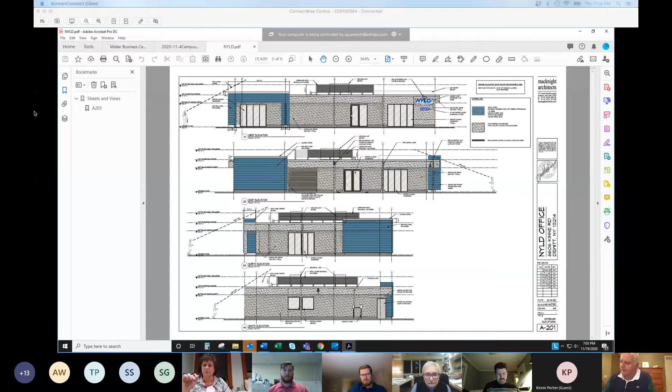I'll do my best. All right, the next item is the Midler Business Center. I think we received all the plans of proposed installation of a chain link fence and site modification in the industrial district.

Nick or Kathy, do you want to put us where we are after Bob's latest submission? Or excuse me, Nick or Stephanie? I'd be happy to walk you through some of the changes.

Please. Yep, okay. So from the last submission, from the last meeting, there was an expansion to the gravel area that we had originally reviewed, which was this parcel over here, and it was proposed to join up to the existing area with a reorganization of all the rest of the gravel lot, which showed some gravel access ways throughout. This proposes a really substantial cleanup to the site by showing a neat corner of the gravel now extending out to the front of the road to connect to North Midler Ave. There will be substantial landscape buffering.

There is now a wooden guardrail shown along the edge of this, just to keep this edge of gravel neat and contained within this area. All the grading is going to be pitching downwards toward the stormwater pond area, so this will keep it neat and keep this as a permanent edge.

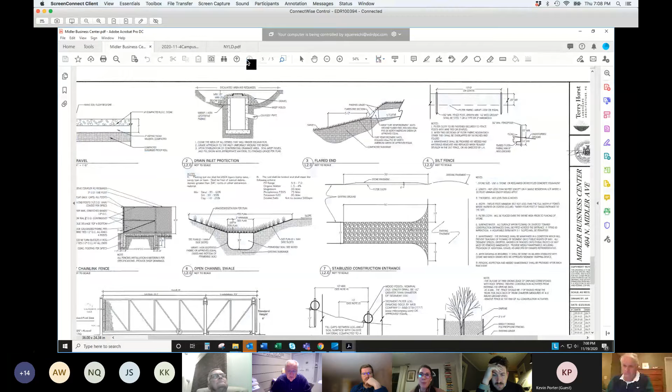The guardrail is a wooden guardrail. It's 6x6 treated posts, only up a couple feet high, with a 2x10 bolted into the vertical post. It's more of a visual thing than an actual guardrail that would get hit, but it will separate the grass area from the gravel area. Great, thank you.

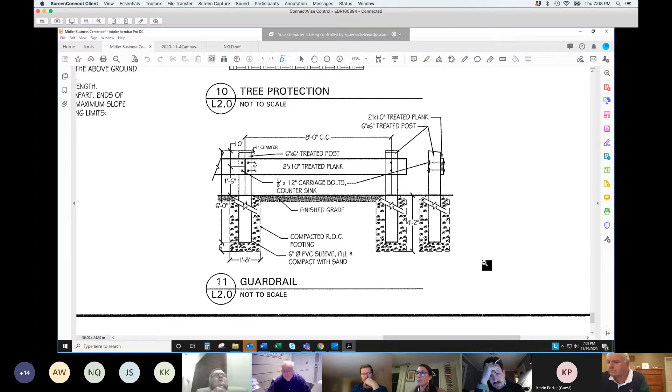Any other questions? No other questions? I think we're good.

We're good. Okay, I'll make a motion to approve the plan as presented with the following findings. The board has reviewed the resolution of June 10th, 2020, which is delivered without comment or modification.

No significant adverse inter-community or countywide implications. This plan was sent by the town of DeWitt to the city of Syracuse, which is adjacent to this property, and the city did not respond with any comments.

This approval is for the plans and other submitted documents, site plan documents that have been signed by the planning board chairperson and the applicant, and requires that all of the work shown be completed by the applicant in order for a certificate of occupancy or compliance to be issued.

Any proposed changes, additions, or deletions to the scope of work or materials from the site plan documents are not approved and are subject to further site plan review pursuant to the town of DeWitt code section 192-122.

That's the motion. Can I have a second, please? Steve, second. Nathan, aye. Steve, Joe, aye. Kathy, aye. I need to interrupt for a minute if I can.

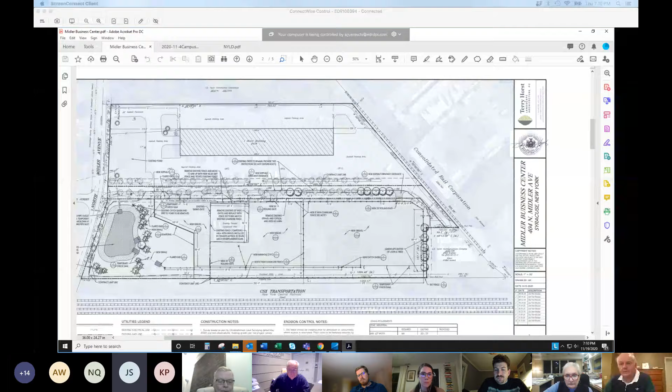Can everyone hear me? So Joe, I'm going to ask that you not vote. We have Kevin logged in as attending, so we have 7 members. So you came in late, so we've got Joanne, we've got Kevin, and he...

That's fine, I'll just listen in, sorry. I think I hit my mute. Did you hear that? Thanks Joe, that's all right. Yep, I'll just listen in.

Got it, the next two items. But wait, we're not done with the vote. Kevin, aye. Doug, aye. Okay, unanimously, thank you.

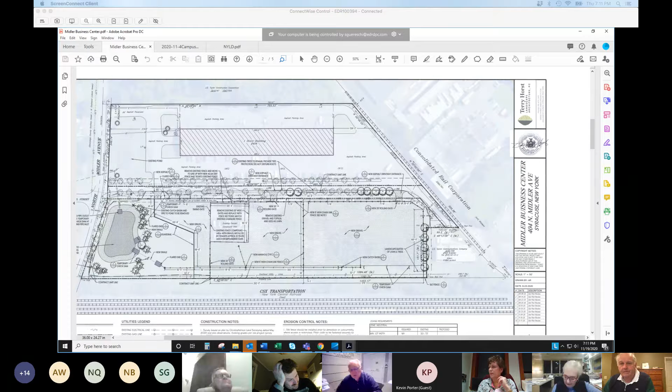Thank you. Do I come in to sign the approved documents tomorrow? Yes, you could speak, Dick. Bob, I'll coordinate with you for the signing of the plans. Okay, alright, thank you. Thanks Bob, thanks.

Okay, we have the KRSM canopy and loading dock canopy site modifications, existing building on Manlius Center Road. Who do we have for the applicant?

Hi, this is Alex Wisniewski. I'm representing the owner as far as the parking lot expansion. I believe there's some representatives from the tenant here as well tonight. Yes, hi, this is Paige Parham. I am representing Amazon here tonight.

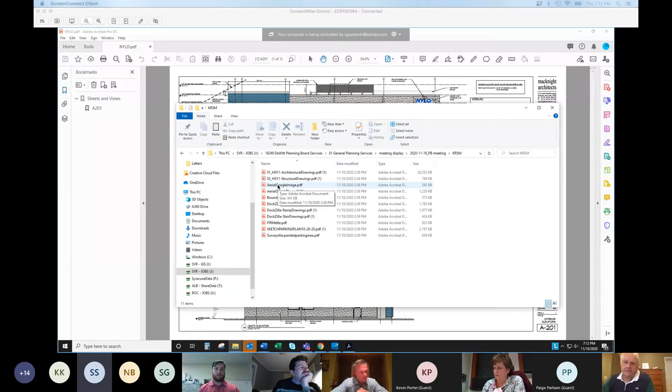Okay, I don't know who I should direct this to, but to start, I'm confused, and I think the board would like clarification on an interior renovation permit that involved a little over an acre of disturbance on a grass area, in an area that had previously been very pervious and covered with gravel.

This is Mike Tormey, I'm the owner of the property. I attempted to clean it up, and it was my fault. I thought I was to stay under an acre and didn't need a permit, but I apologize. That was my fault.

You didn't need a permit for under an acre. Jamie, would you comment on that? I just want to be sure the board understands the significance of what's happening.

The only thing I'd say is that site plan approval is required anytime there's work done on a commercial site, and there were changes. So that's why you're here, because of exterior changes to the site. The acre requirement has more to do with stormwater management, not the rules of the planning board, but the town code. That's why we're here, and it bears on the coverage.

Okay, so they're moving forward on the interior, and that permit is ongoing. I'd like to ask who's going to speak on behalf of the recommended changes being presented.

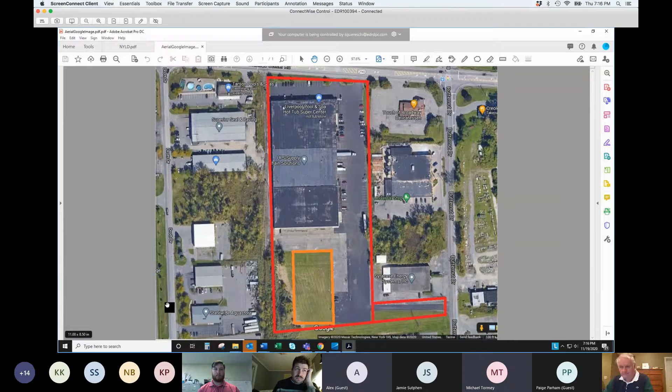If you look at the image on your screen, that's the existing conditions of the site. As Mr. Weber mentioned, the area shown in orange was previously a lawn area. We have a survey showing that a long time ago there were additional gravel areas there. Long story short, that new area was being prepped to expand the parking area as part of the lease agreement when the stop work order was issued. That gravel area is currently slightly less than an acre, and the new proposed plan before you tonight also keeps not just the new asphalt, but the total disturbance under 1 acre.

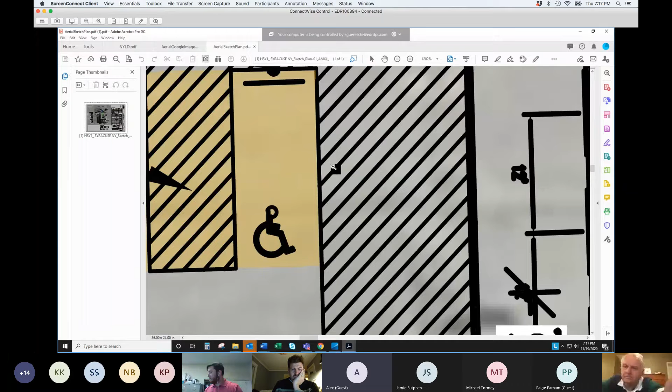The issue with that—Stephanie, if you could—yeah, that's a good one. This shows ideally what Amazon would like to do. It's showing this dock extension on the south side of the building, which would allow them to use an existing overhead door on that wall. The dock extension provides an additional 3 bays of loading, and the balance shown in red is essentially their long haul trucks, the longer tractor trailers, with room for 12 of those vehicles to park in addition to the 3 loading spaces associated with the dock extension.

The blue images are their smaller box trucks, with space provided for 39 of those vehicles. What you see in yellow is essentially employee parking, about 40-plus spaces. The intention is to segregate the employee parking and access to the southern wall of the building from the delivery vehicles and their parking, and that's driving the layout of the parking.

The positioning of the dock extension is really dictating the location of that existing overhead door, which starts to drive the site layout. This plan proposes about 0.9 acres of additional pavement.

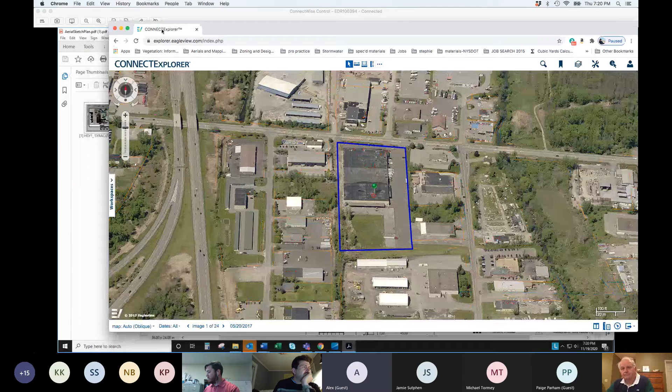So I guess we're to some extent looking for direction from the planning board. If you feel this is something that would be agreeable and you would support the variance, we would probably proceed with that application, before coming back to your board with the final engineered design drawings.

So I guess for starters, I think that's the big issue, is the need for the variance that this current layout mandates. And if there is a reasonable shot at that, I think we would attempt to pursue that variance with the ZBA. Well, I think there's another matter here as well.

I think we're looking at a traffic study. This is a pretty intense use of the property, so I don't think we can take any recommending action on a variance until we have a traffic study completed.

Okay, and that's understandable. The other thing in regard to the traffic study and combining the two parcels to get to approximately 81%, that seems to me in this tight lot that this is going to be a prerequisite almost of going forward. Is that something the owner is amenable to?

Yes. Yeah, combining the two properties, yeah, I have no problem with that. It would still require a variance, even with 82%, it would still require a variance. Correct. It makes it more comfortable relative to coverage, though.

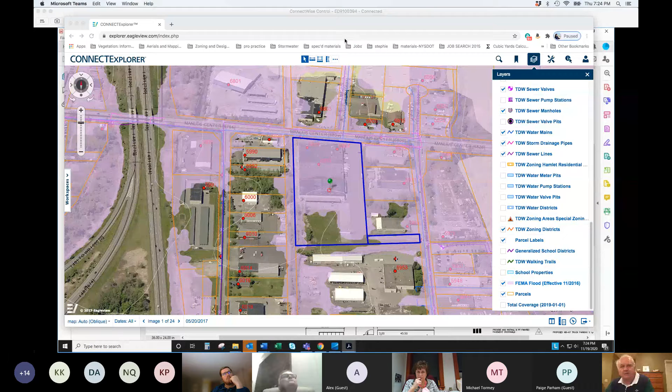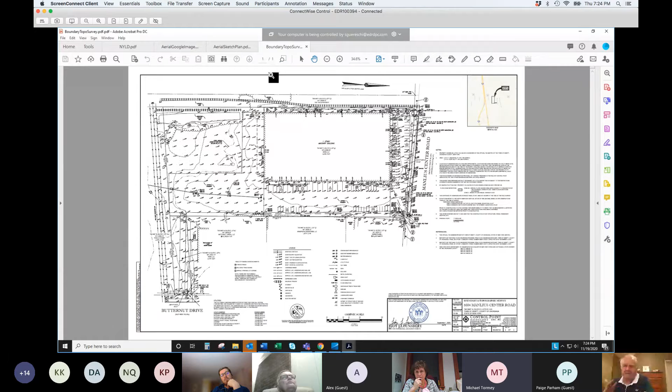I suppose I assumed that they would use the front entrance and Amazon would use the back entrance, so I didn't think it would have much of an effect on them.

Mike, if I could add, I think a traffic study would start to define the traffic patterns in and out of the site, and whether there are impacts to those patterns.

But if you are familiar with the site, you can see that on most days there isn't a lot of current traffic, and quite a bit of the parking is currently unused on that site, if that assuages any concerns.

Well, I think we would still be concerned with the need for a breakdown of the tenant usage, like how much is warehouse and how much is office within the various tenants.

Understood. Now, looking at your code, the majority of the building is used as warehouse. You've got Liverpool Pool and Spa using about 21,000 square feet. The total building is about 110,000 square feet.

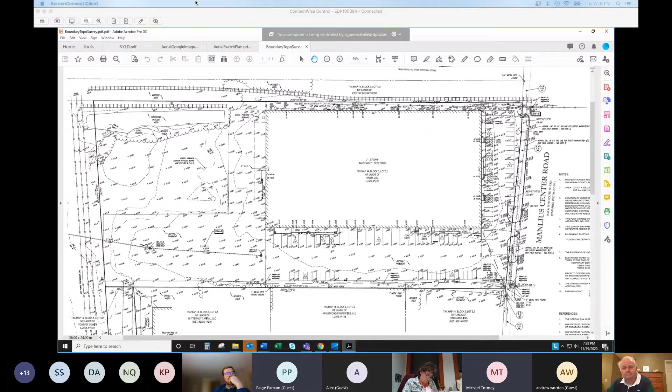So I believe right now our line haul counts... I was just trying to look at our dock door study here. It looks like, apologies guys, I had this right in front of me.

I may need to come back to you on that. I think part of it is that we don't really have a study on what we're going to use for just 3 dock doors right now. Once we have 8 dock doors, we'll address that in our traffic study.

Okay, Paige, I had a question relating to the Dockzilla, the portable dock. In my 15, 16 years, I've never seen a portable dock with this kind of activity.

Is a more permanent structure feasible for your plans? I mean, it could be feasible.

We have not gone that route because currently we usually lease out spaces for a 5-year period of time, and I believe this lease is again under that 5-year period. When we have situations like this, we usually go — and I don't necessarily want to use the term portable.

It's more of a modular structure, meaning it's built in a conditioned warehouse and then put together on the site. But it will be permanent in the sense that it's not going to blow away like a trailer, I guess is what I'm going for.

We do this a lot for Amazon. I understand, does that make sense? But from a building code point of view, this is being considered a permanent structure, correct?

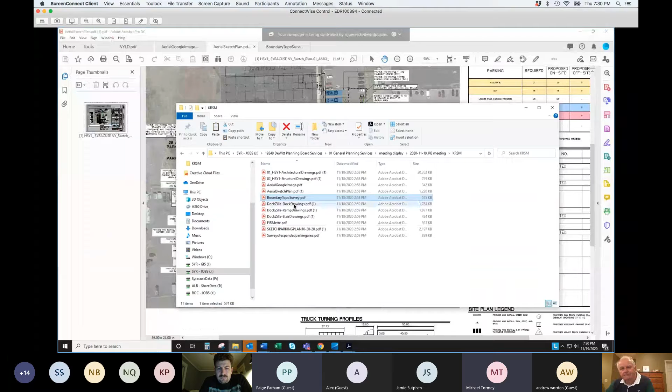I believe so. It is structurally tied into the building, in terms of foundations and type of construction and all that stuff. I have our architect on the call. I believe the answer is yes there. Katie, do you want to speak to that? They are in charge of our permitting and architecture and PE plans.

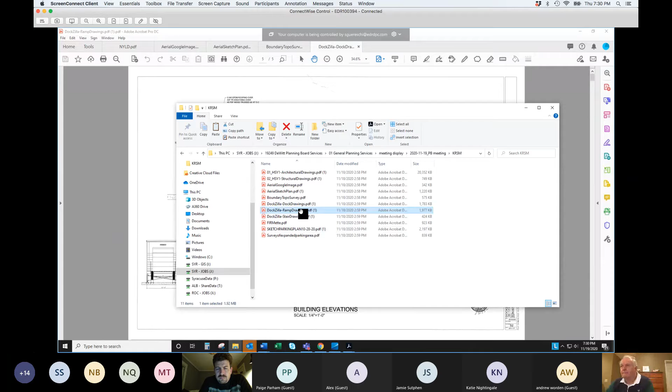Yeah, so the DockZilla, I wouldn't consider it a permanent structure. There aren't foundations for it. It's not structurally tied to the building. It's compliant for the codes as far as accessibility, things like that.

Actually, Katie, I'm sorry to interrupt you. Ed, are you able to - I've got our construction manager too. He's actually on site and going to be building this. I think he'd be better to address that question. Ed, are you able to get off mute? Let's see if I can get him off mute here. Apologies, he is stuck on mute.

I apologize, guys. He's chatting me. He says he can't get off mute, but yes, we are gonna structurally tie this built into the building. So I apologize, guys.

No, this is a concept review. So okay, we're just asking the questions that we'll want to have answers down the road.

Absolutely, absolutely, and we do have a PE that's - yeah, absolutely, we do have a PE who's designed this, who is working with our construction team. Sorry, Ed is trying to chime in here, but yes.

Paige, are you able to have Ed jump back on the call here? I had muted everybody earlier just because there's a lot of feedback. He is trying to, he got disconnected. He does say it has steel base footers. Okay, so I'm sorry, I'm reading as we're chatting. Okay.

But again, we can get these questions all together, guys, and respond to this. I know that we need to get this together. We need to get a traffic study together. So I will definitely make sure that we get you guys a response to this.

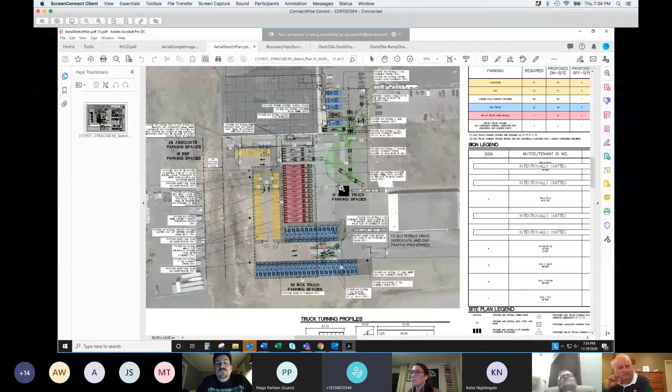Andy, is that code, does that meet our code? Yeah, it's basically viewed at almost similarly to portable stage material. It looks like it's probably an adjustable paddle type foot that can be raised or lowered to level out the ramp as needed. So it'll have to be secured, but that's pretty common. Yes, that's correct. Okay.

Any other questions from other board members? Is this something that we normally allow, Andy? What I would view as a temporary solution for a 5-year period? I think that's really up to the board, Steve, as a whole to decide on how they want to do that. If this is a 5-year lease, they may have some issues with our climate up here, but it's something that could be approved on a short-term basis.

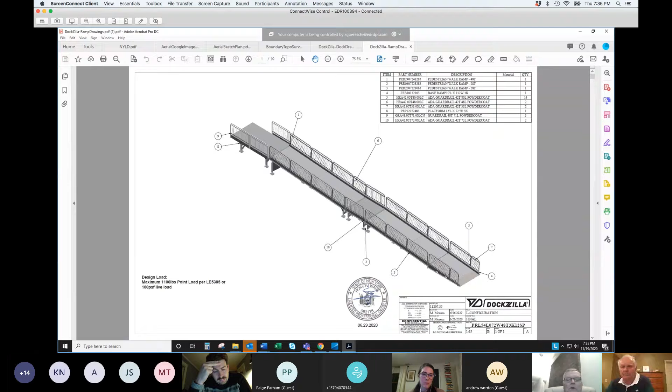Okay, thank you, Andy. Anybody else have comments? Again, we look forward to the traffic study and the different weigh-ins on the part of O'Brien & Gere and Mark with the storm water main. I think the only other thing they'll be looking for down the road is the truck information. We'll move to this as we get different information.

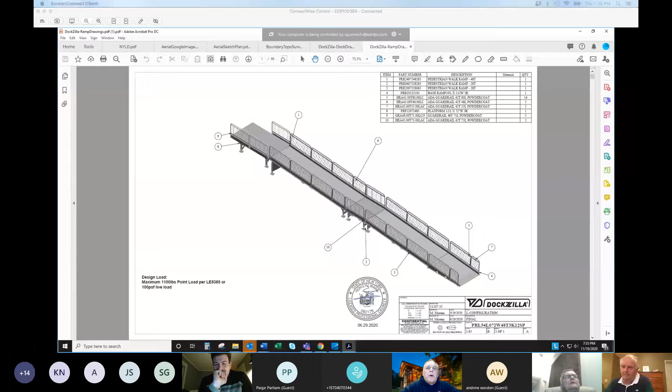Go ahead, Leif. Yeah, the other thing that catches my eye when we look at the site plan layout is the tightness of the truck turning radius shown along the edge of the parking, that green area, and up to the right. Those motions show a lot of having to block traffic and parking in that top right area. What really is the intent there? Because all those cars we see parked there right now can't park there if there's ever going to be a truck in motion there. That's got to go and be accounted into the parking count and layout, and striping programs and all that for that area.

There was another comment made about a canopy. Have we seen anything on the canopy?

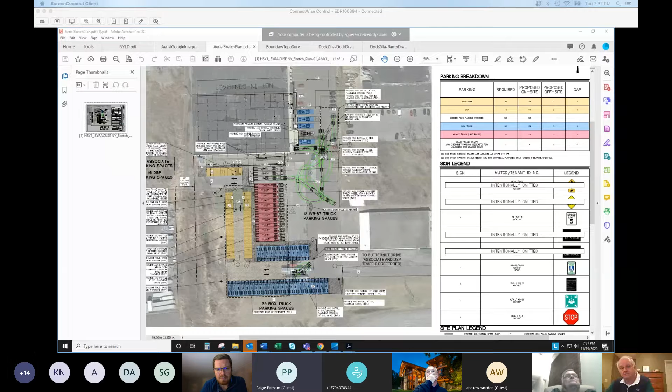There's no elevation yet. I can speak to the first question. On the tight turning radiuses, all of our operations happen overnight, so we don't plan on blocking any parking. The parking that you see currently in that green area, we will be blacking that out. That won't be parking anymore, so those cars will not be parked there whenever we're in operations. I hope that answers the question.

But you will account for that parking elsewhere on site? Yes. So that just goes to the overall site count—just making sure you're accounting for whatever spots you're relocating. Yeah, will do.

I think this is a significant change to the property, and we always look for opportunities to enhance properties when such a significant change happens like this. So I'd like to look at opportunities for enhanced landscaping and lighting, and generally sprucing up the property. And what's the benefit to the public view?

Yeah, the fence is in disrepair. The green space is not kept well. But this has been very helpful. Anybody else from the board want to weigh in?

Okay, thank you, Amazon and consultants, and we appreciate the introduction, and we look forward to further submissions.

Peter, I apologize, this is Paige from Amazon. If it's appropriate, I do have one more question. Currently we have an interior building permit that we just completed construction on—I don't want to say completely unrelated, but a completely separate permit than what we're discussing here tonight. As of last week, we had passed all of our inspections. We've completed all the punch items that we received from the reviewer or the inspectors that came out to the site, but we have not yet been granted a TCO so that we can begin operations.

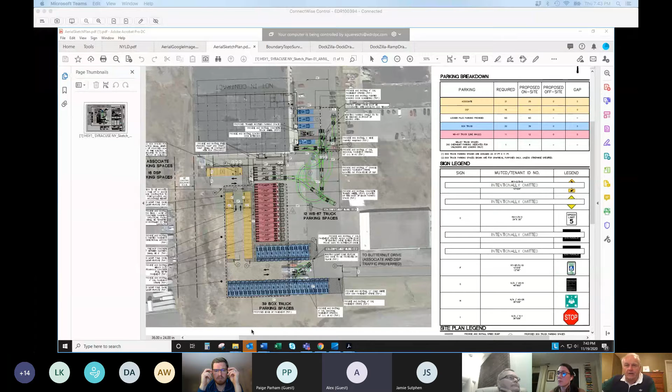We have the next item, the discussion regarding the Campuswood Drive and site modifications. Who do we have representing Campuswood Drive? This is Terry Horst from Terry Horst Landscape Architecture, and I think the owner should be on as well.

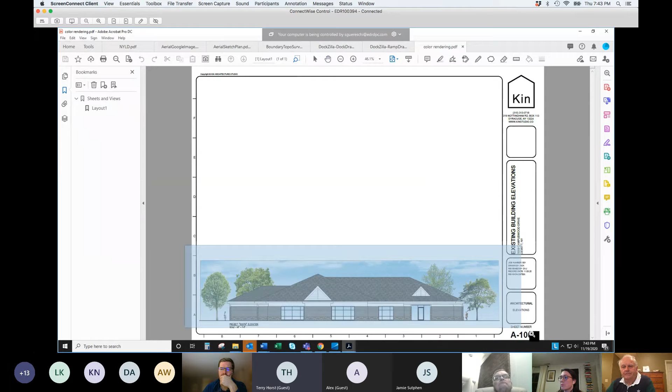Mike, I don't know, are you here, Mike? Okay, all right, I don't know if he's here or if he's having problems. But what's his last name? I got Michael T. I don't think that's him. It should be No, Joe. Michael Stormy. Yep. Do you happen to have his phone number? Because I've muted a couple callers. Maybe I can unmute and see who's here. Okay. Well. Oh, I'm not able to unmute. Only they can. I apologize. Okay, Terry. Yeah. I think that we'll just. Okay. Wait. I'm sorry. Give you a lay of the land.

No, it's okay. What I wanted to start with is we knew this would take a lot of due diligence, and there's been Steve and several others that have worked hard on this, Nick, Andy, and Jamie. First thing I wanted to address was the parking, and something came to light just this afternoon. Jamie, could you bring us up to date on where that shared parking agreement is, the document?

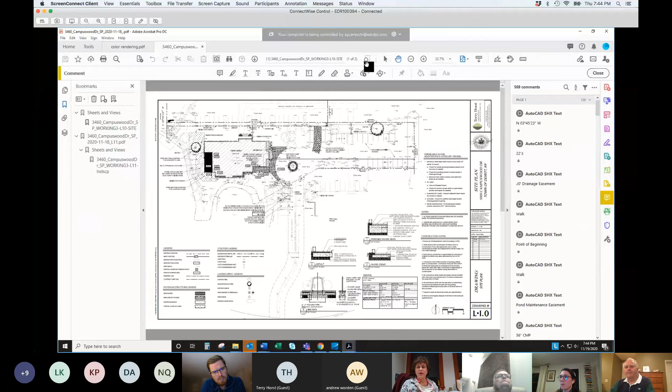So, well, let me talk. There's two things that we know and found out. One is that the parking count that was approved for the daycare center, and it was for this lot only, was 20 parking spaces. Okay. And there is, and we have the documentation for that, thanks to Nick.

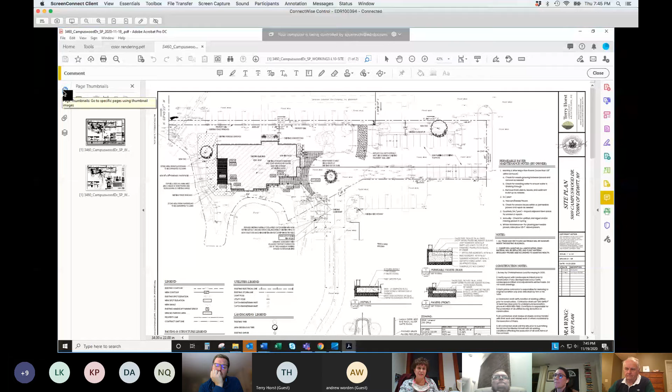So with respect to that, we do have a provision in our code that provides that if there's a finding of a use not increasing in intensity, then the 20 spaces is a good count, and it was a legally established count with respect to the daycare center. So now we are talking about an office use, and maybe, if it's not as intense a use, we can use that.

We did find out that last year, the owners of these two lots entered into a reciprocal easement agreement for shared parking. That has not been approved by this board, but it is in place. So if there's going to be parking on an adjacent lot, then we would, from a planning board standpoint, have to determine that lot number 1 isn't using spaces that lot number 2 uses, and we can do that analysis.

So it's a private agreement at this point, but it certainly can be made part of this resolution if that's the route this board wants to go. It would be a parking analysis. My understanding is that currently, with the low impact of the office they're planning and approximately needing 14 or 15 spots, they would stand alone in the shared agreement. But we'd also need a count from the Make-A-Wish folks as to their level of need, so we know there's enough space both ways, if that's the route we go. If we go the 20, we may not need it. Okay, Jamie, that's very helpful.

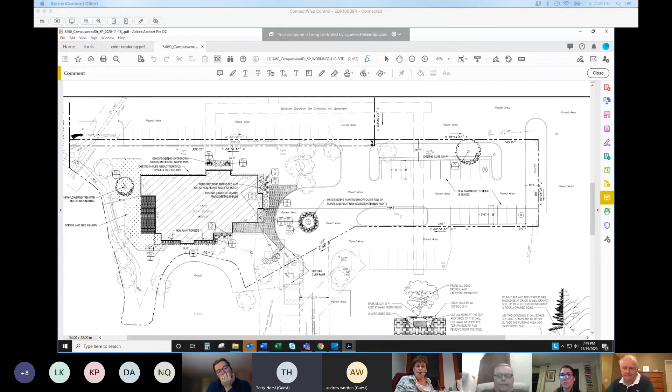So can I just add on that parking agreement real quick — the agreement is with the property to the north, not the Make-A-Wish property. It's that larger parcel with the large parking lot at 5009 Campuswood, not Make-A-Wish or this property. So there's a lot more parking on that site than we would have available at Make-A-Wish.

For the landscaping, we're putting in all new foundation plantings, turning the area that was once surfacing for the playground back into lawn around the patio, which will be a porous patio. We added more foundation plantings along the south side of the building, and in the center turnaround as well, we removed and replaced all those plantings. I think we're keeping the larger trees around the edges — those cloud-shaped trees are existing and we're keeping them. We're adding another larger tree up by the parking lot in that green space.

Any questions on landscaping? Yeah, this is fairly comprehensive, and I think it's a really nice complement to the existing park-like atmosphere here. Thank you, and we did add a bike rack — it's not shown on there, but we did add it. That was one of your comments, Stephanie.

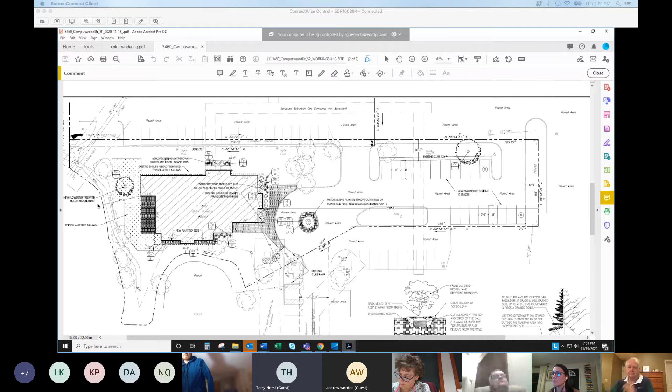And I think we're going to propose to replace that catch basin in the corner instead of trying to repair it on the Make-A-Wish property.

Terry, would you like to comment on the patio proposal? Yes. So the patio is at the back of the building, where it'll be overlooking the ponds. It's a permeable paver — if you went out there, there's a pallet of pavers, that's the paver, and it'll be set in a permeable base. It's just squaring off that corner of the building. There's no additional fencing or anything added to the patio.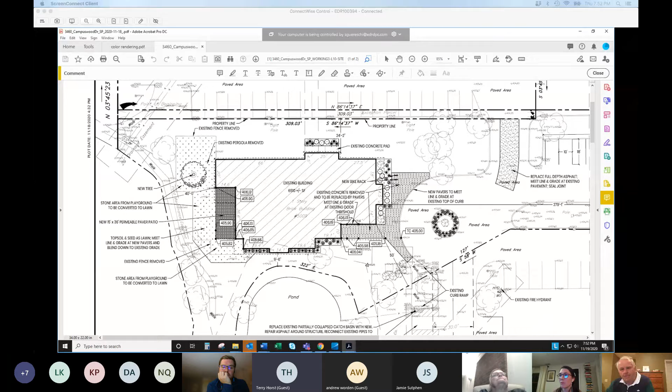Terry, is there a maintenance plan in place to care for the permeable pavers long-term? Yes, and we added notes to the updated set of drawings we did today that reflect that.

So I think that leads us, if I'm not mistaken, to our famous question having to do with the stone and the painting that occurred. Yes.

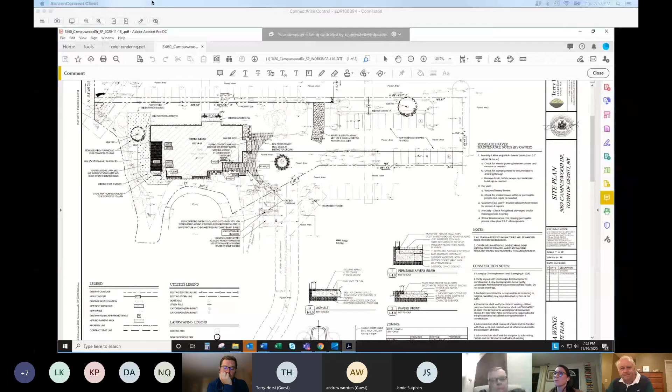Have all the other board members gone out to see the building? This is Kevin, I've seen it. This is Kathy, I saw it last week. Leif, have you seen it? I saw it. Doug? I did not make it out. No, Steve, I have not seen it in person.

Okay, I want to get the different board members' perspective on the painting and their position on whether it needs to be reverted back to the brick, left the same, or some other treatment.

Have we seen the materials physically? I know we can't touch and see them, but have we seen the actual colors or anything other than the rendering? We dropped off physical samples, one set, to the planning department when we submitted, and we submitted the paint chip colors as part of the initial package. So that should have been handed out.

Has anybody, Stephanie, I guess this is directed toward you. I worked with the designer at EDR back at the time in the late 80s when this was done, because he was biding his time between a project that I was managing at Syracuse University and this Pioneer Office Park.

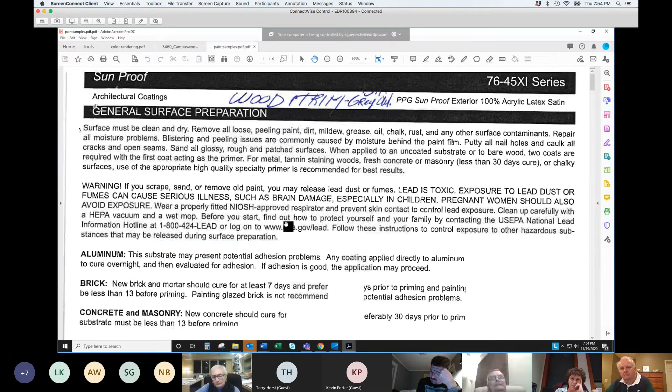Was there any kind of a set of internal design guidelines to this project? Have you been able to find anything out in the EDR archives? No, I haven't. The designer at the time, his name was Mike Moore. I'm sure Joanne would probably remember him.

We can look, but I'm not sure what we would have, because that type of guidance would probably be on file with the town of DeWitt if it were binding in any way. And I can't imagine that we would have something in our files that would provide that level of description.

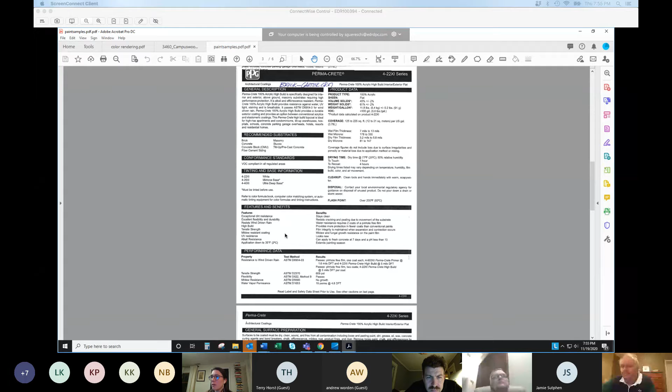Not from landscape, we haven't seen anything. Right. I guess my big concern is that if other buildings in this office park continue to get sold off to independent owners, and people can come in and do whatever they want to these individual buildings, we lose the cohesiveness of what is really one of the nicest office parks around. That's my feeling.

Okay. Leif? Leif, you're muted. You're muted. Try that. Oh, there we go.

I'm going to second Steve's opinion on this one, because you can have a project that's good and meant well, and even if the colors are right, the problem is there's an overlying perception and theme to this campus. I'm not all that enthralled with relying on chasing painters 20 years down the road when somebody wants to change the paint color arbitrarily and it doesn't ever come in front of the board again, and you get a mishmash of things, when right now there's a very cohesive set of design elements out there.

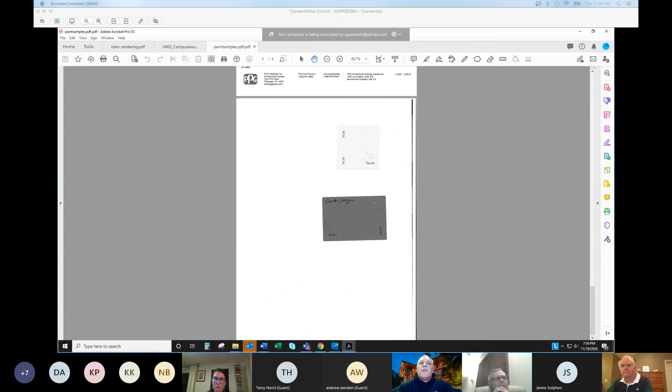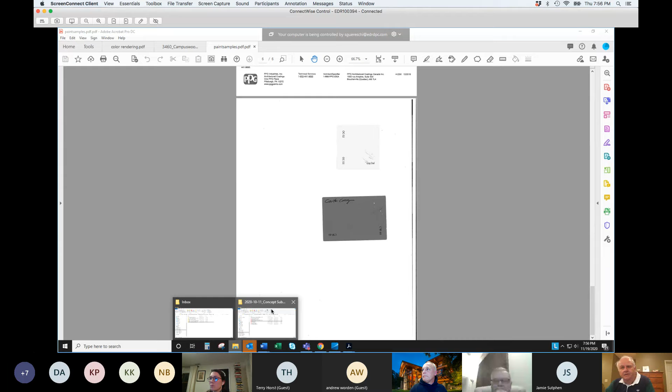Agreed. I would agree with that 100%. Nathan? Yeah, I agree with Leif and Steve's comments.

Doug? I haven't seen it in person, but what I can say is you don't paint brick. I don't know what this paint material is, but you don't paint brick. It's a maintenance nightmare, so unless it's inside. Unless it's inside.

Kathy? Thank you, Doug. Well, as I said earlier, I didn't think that it looked that bad. I thought it was attractive. I do agree with that thought that we don't want all the other buildings changed, because then it would be a mishmash.

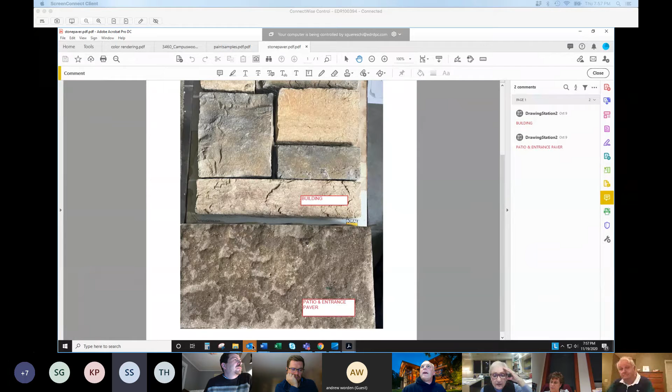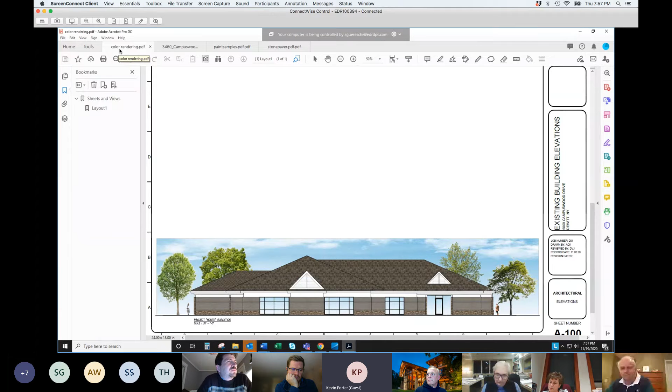Yeah, we just end up with no control. Right. Kevin? So I visited the site today, and I think it's Terry, can you comment? I didn't think the siding was brick. The way it was painted, it looked more like a siding, and then on the mid-level. So is it brick or not? That is brick, it's just the paint is a brick paint, and it soaks into the brick. Gotcha, so that's what I looked at today.

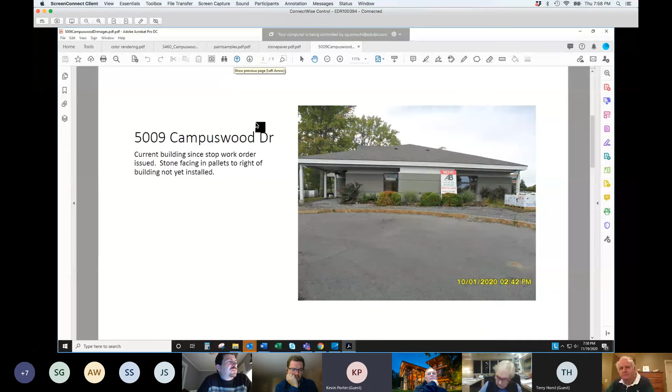From my perspective, being more of a layman, I could only see one building at a time, given all the landscaping around it. I couldn't see the other buildings. For me, the streams and the lake were more what connected it. I've never actually been up there before.

Joe, are you still on? I mean, this is just a discussion. Joe, if you're trying to speak, I muted all the callers to reduce background noise early in the call. If that's the case, you might want to hang up and try calling back in. Okay.

So Terry, you've heard the tenor of the board, strongly to go back to brick. I don't know how you're going to do that, but that's the feeling. I would think pressure washing would probably do it. Well, I'm not an architect, so I don't know how all these paints work on buildings. But I was told that it basically soaks into the brick, it permeates into it, so pressure washing will not take it off. Yeah, we'd have to test it out and see if it will.

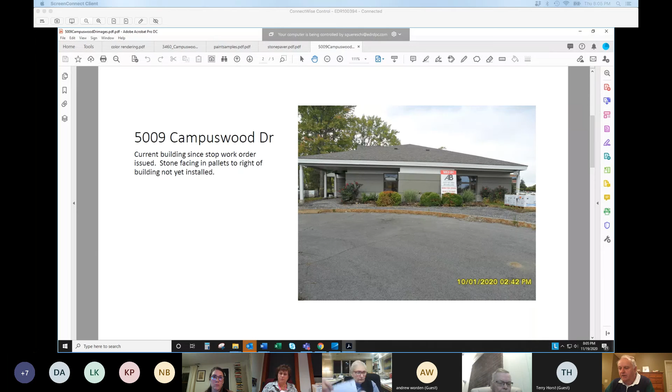And then I had one other item. Leif talked to me later this afternoon. Leif, do you want to just bring up what we talked about? I don't know who was on the line, who was on Tuesday, but we talked about the senior housing that's near the new shopping town, which lots happened in a couple of days. Would you like to just bring people up to date? I don't mind if Leif brings people up to date, but I want to make clear on the record...

He will be recusing himself from any vote or further discussion on the project, because of his personal involvement. So if we can, that is correct. Okay, yeah, I was officially hired as of last night to do it.

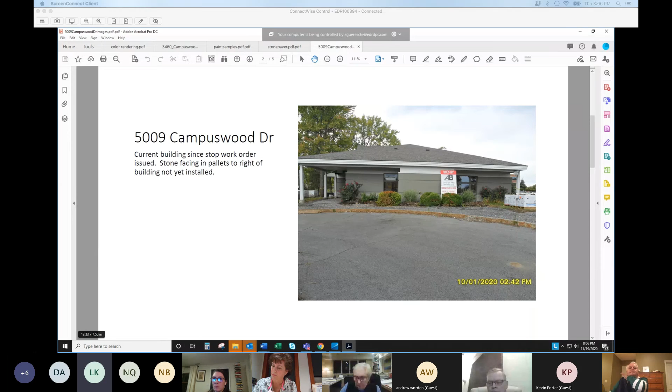Should we adjourn, Jamie, because it was not an item on the agenda? Well, it's if Peter wants to bring it up, that's up to him as chair. Yeah, let's adjourn the meeting as we just had, presented with the three agenda items and the one discussion, and then we can just convene with the enlightenment of Leif now that he's involved with the project. But then at that point, he'll have to recuse himself in any further discussion.

Peter, I'll make a motion to adjourn, but I have a question just for scheduling purposes. What are our dates for the next meetings in December? You had said the first, and then I thought I heard Nick say the 8th and the 10th. Yeah, the 8th is the work session and the 10th is the agenda meeting. The 10th is the meeting.

And historically, we have not had a second meeting in December due to the holiday. So it would be the 8th and the 10th only. Because if you go the 8th and the 10th, then it would be the 22nd and the 24th, which is Christmas Eve. I can tell right now I'm not attending.

I know, Steve, you have to come down that chimney. That's what I was going to say, Kathy. For some reason, I had it marked in my book as doing it on the 3rd.